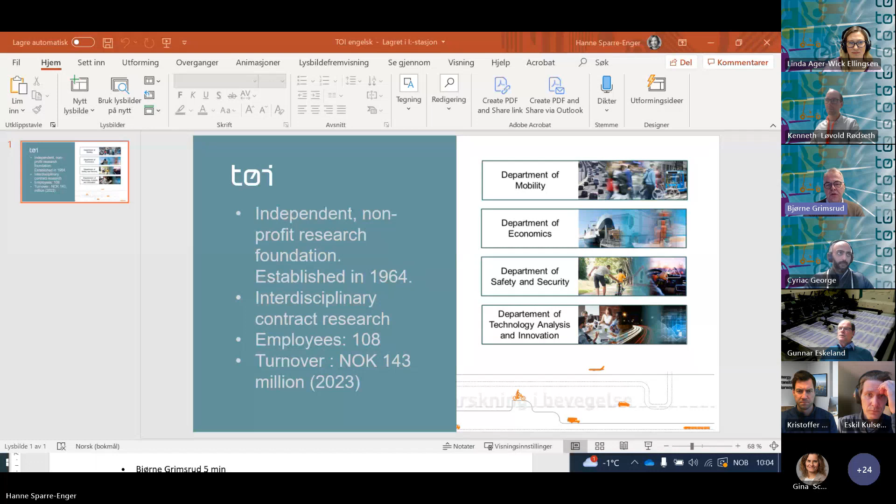Thank you very much, and thank you for having this opportunity to present TØI. I am heading this research organization, and I'm very pleased for TØI to be a part of this very interesting and needed research network and research activity on hydrogen.

I'm just going to briefly present who we are at TØI. We are an independent non-profit research foundation established in 1964, so we turn 60 years this year, and based mainly coming from social science, but very interdisciplinary contract research. That means we have employees with a very different background, but mainly social science, and that we are contract researchers.

That means that we are, in practical terms, based on the different customers that buy our research services. But of course, public funding like this is a main resource, of course.

We are 108 employees, 80 plus researchers, actually 90 plus, but 80 researchers full time, and we are organized in 4 different departments, which you see here.

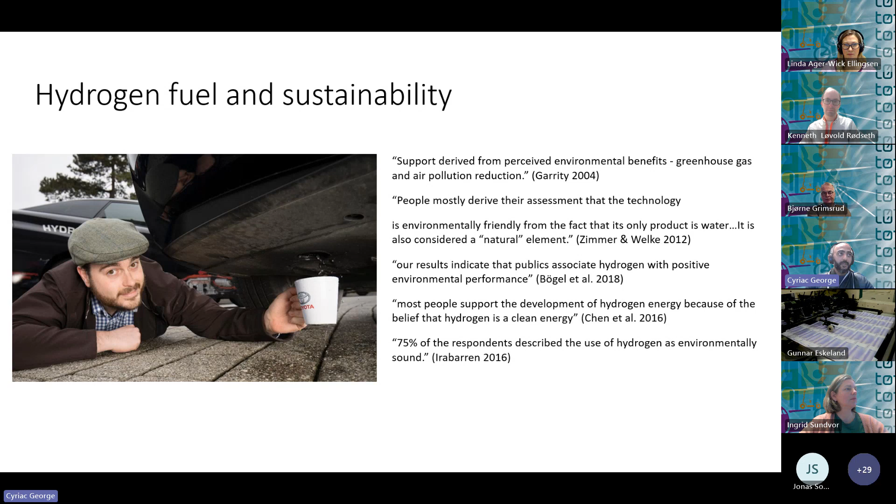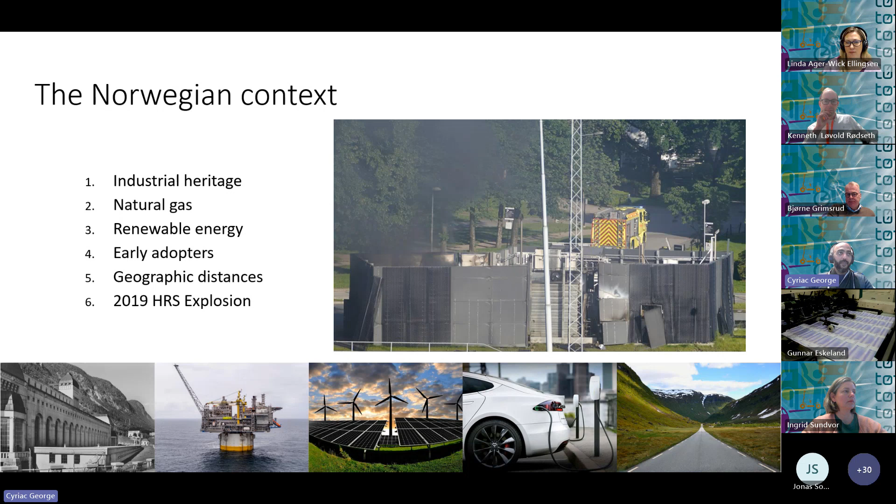What we did is we made a survey, nationally representative, with over 2,000 participants, about a year and a half after the explosion.

What we wanted to do here was ensure that we're not putting a lot of ideas in the participants' minds. So we did not want to make this a hydrogen survey and ask, are you scared of hydrogen? Because that is quite a leading question.

So the survey was actually structured as a comparative survey of alternative fuels and powertrains for transportation. Participants were given a range of questions about hydrogen, battery, petrol, diesel, and natural gas options. We were most interested in hydrogen, but all powertrains were included so as to present it in a more neutral manner.

In part two of the survey, participants were told that they would be given specific questions about one of the alternative drivetrains. In fact, what happened is every single participant was given hydrogen questions. Here we were able to ask some more detailed questions specifically about hydrogen.

There's a lot of factors we were interested in, but because of certain choices we made, we did not go into aspects of the green, blue, gray production methodology, gas, liquid, or ammonia. We didn't get into willingness to pay or even economic development, distriktspolitikk, that sort of thing. We were mostly concerned with awareness of hydrogen, perceived sustainability, and perceived safety risks.

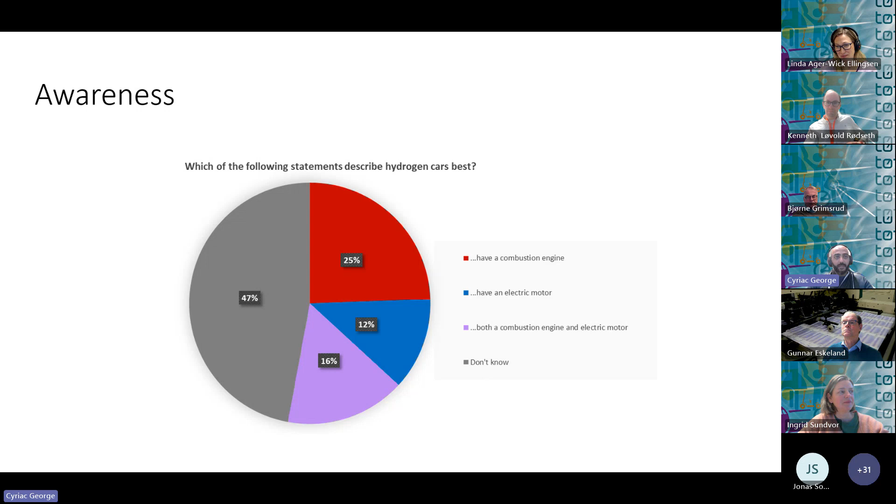This is a very small percentage of people that know that a hydrogen fuel cell vehicle is in fact an electric vehicle. And in terms of discourse, we felt that this was important in terms of how hydrogen vehicles are framed. And sure, we can't equate hydrogen vehicles with battery electric vehicles, but in terms of how it is perceived, I think there's a lot to be discussed there, especially given the fact that 47% of the respondents claimed simply they don't know.

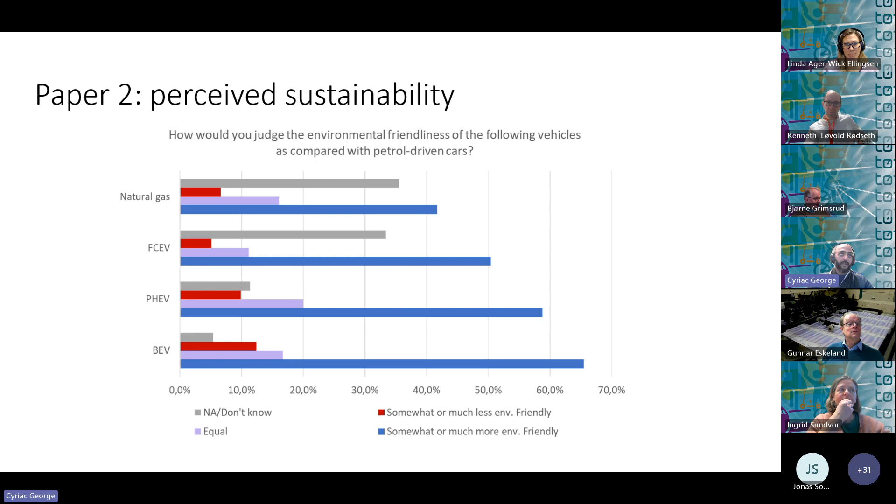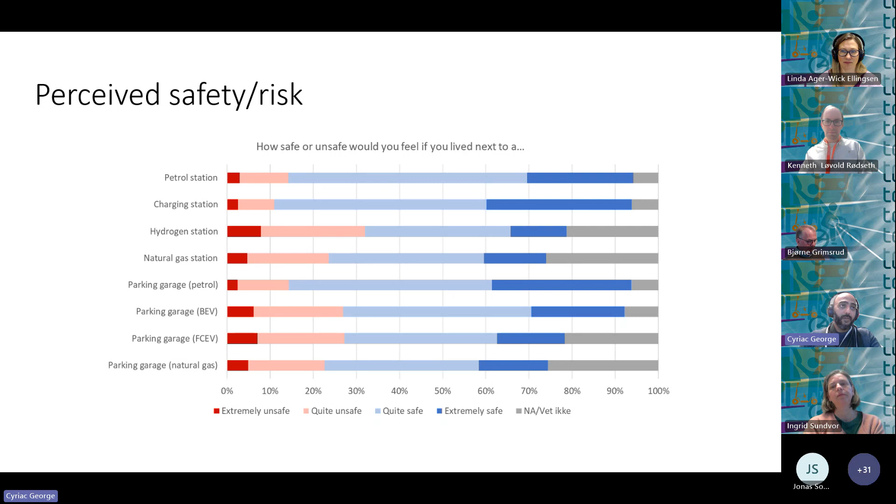Moving on here, we also asked about how safe people would feel living next to a station. We asked this because the societal acceptance of a fuel is not just about whether people use it in their own vehicles or in their own transport, but whether or not they are willing to tolerate it within their environment. And here we see, once again, that hydrogen has the least level of tolerance or the most amount of feeling unsafe. But it's also important to note that there is a high level of uncertainty, with about a quarter of respondents saying that they don't know, and more than half actually saying that they would feel safe. So this is not a very high level of fear, we believe.

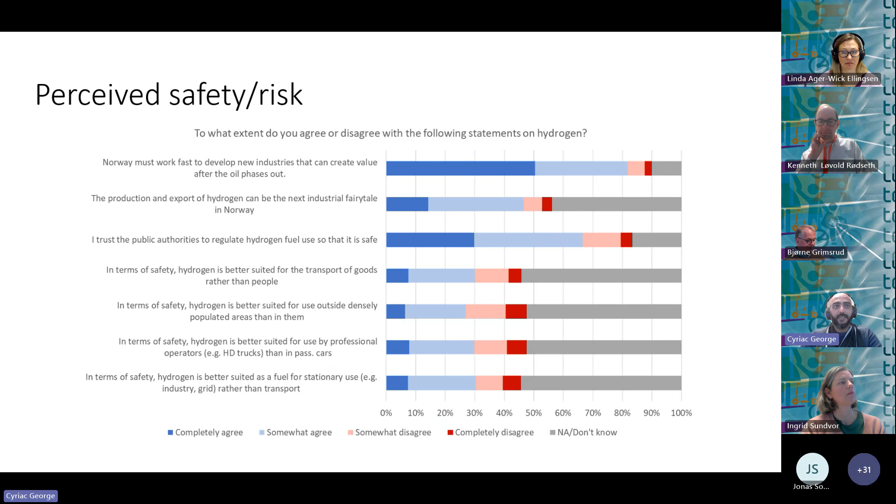Proximity to the explosion. This was somewhat surprising. There was a lack of significant relationship. There was even a slightly positive association with proximity, so the closer you were to the explosion, and this wasn't significant though, the less fear you had. And thirdly, perhaps the least surprising part of the analysis, the more aware you were about the explosion, the more scared you were about it. And this was a very, very significant relationship.

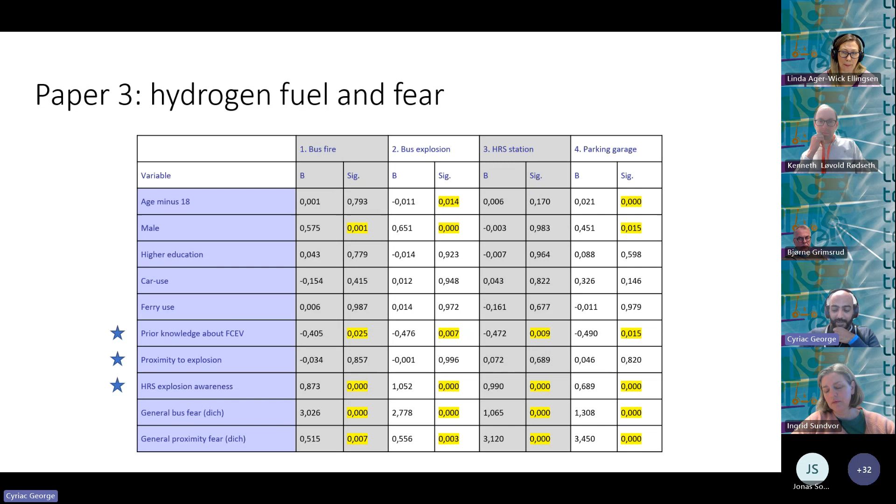We're still digging through this, and there's still literature that's going to be coming out from TOI with respect to this, but that's all for now.

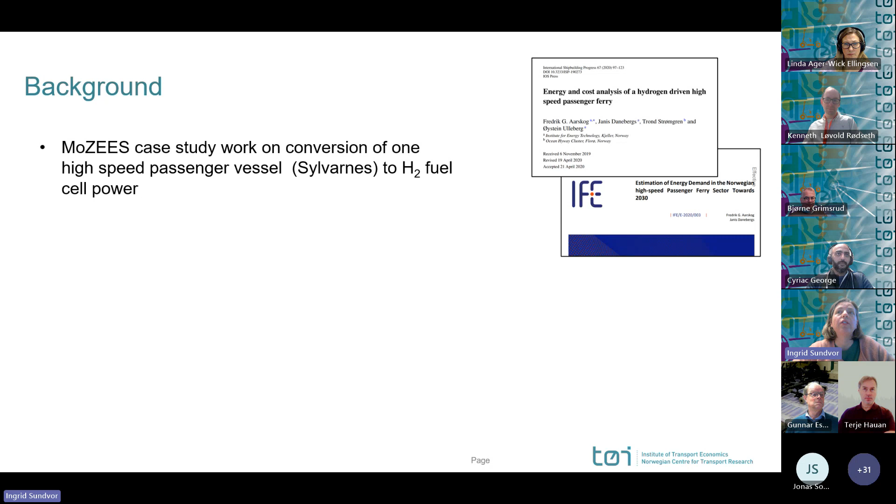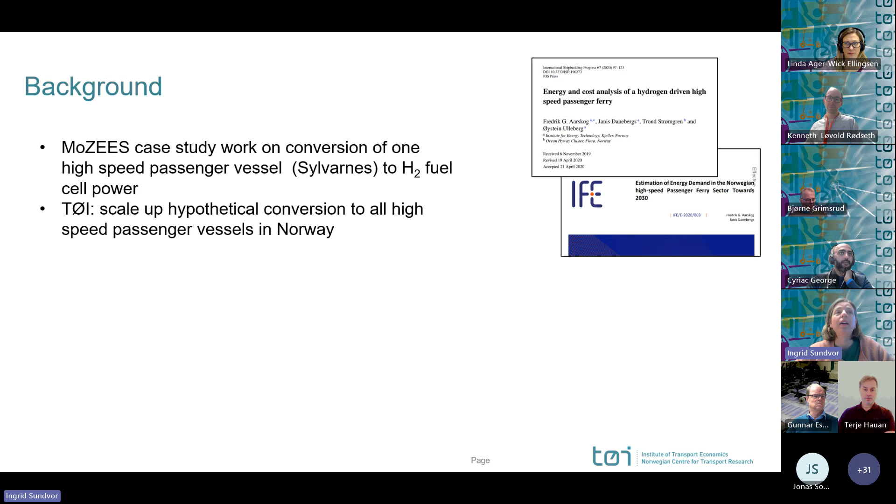So this work started in another FME, MoZEES, with the case study performed by IFE, where they looked in detail at one high-speed passenger vessel for conversion to hydrogen fuel cell power. And then the question was how about scaling this up for all high-speed passenger vessels in Norway, and that task was given to us. To be able to do that, we needed a model, and that's the birth of our model.

So we did scale up and applied this for all registered high-speed passenger vessels in Norway. This resulted in a paper, where you can read more about the results, but I will give some examples and cases from the results.

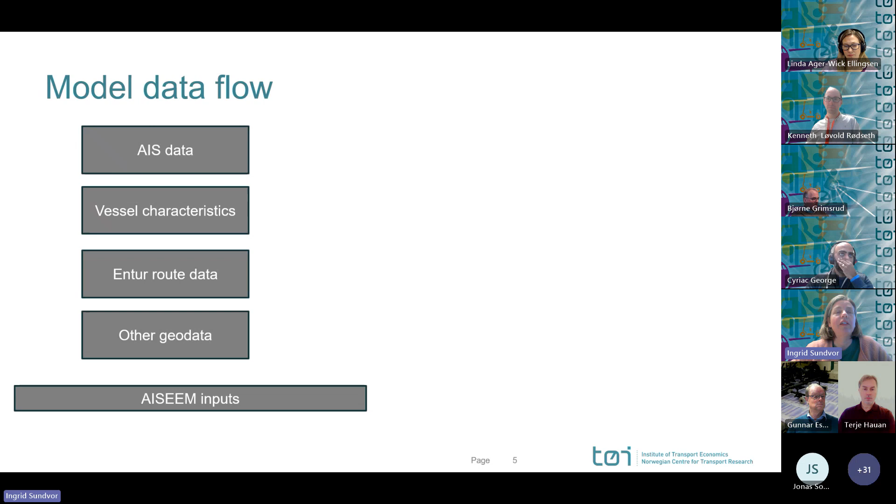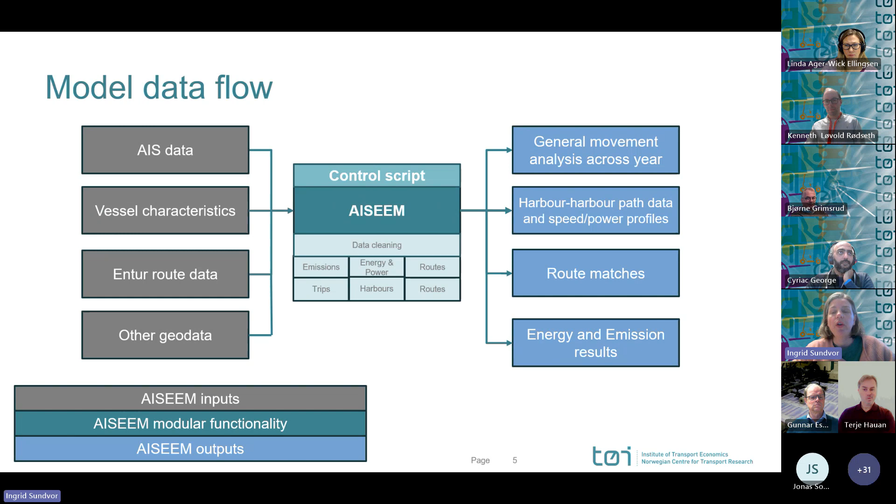I will go a bit more in detail on the different levels of the model, but first an overview. We have, of course, different kinds of data needed to do our analysis. The main model is quite modular, so we can pick and choose what parts we are interested in, according to the case. Some of the main outputs are general movement analysis, and more detailed harbor-to-harbor movements and speed power profiles, for instance. When we're talking about passenger vessels, the routes in public services are of interest. And this is an energy and emission model, so we also get results on emissions.

So a little bit about the data. This is an AIS model, so the main data is AIS, and the main data we use is the position and speed. This is high resolution data with varying timestamps, typically a resolution of 2 to 10 seconds. From this, we can do the movement analysis, but if we want to look into energy and emissions, we also need other ship data, for instance, very importantly, motor power and other characteristics of the vessel.

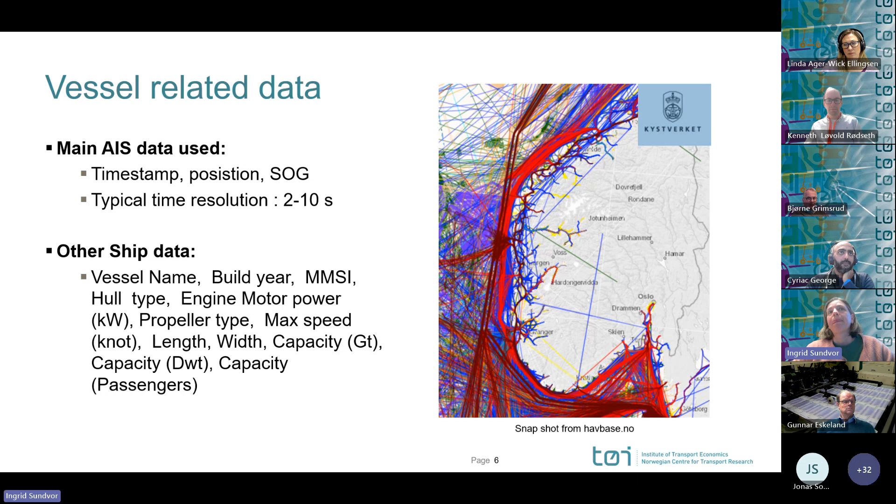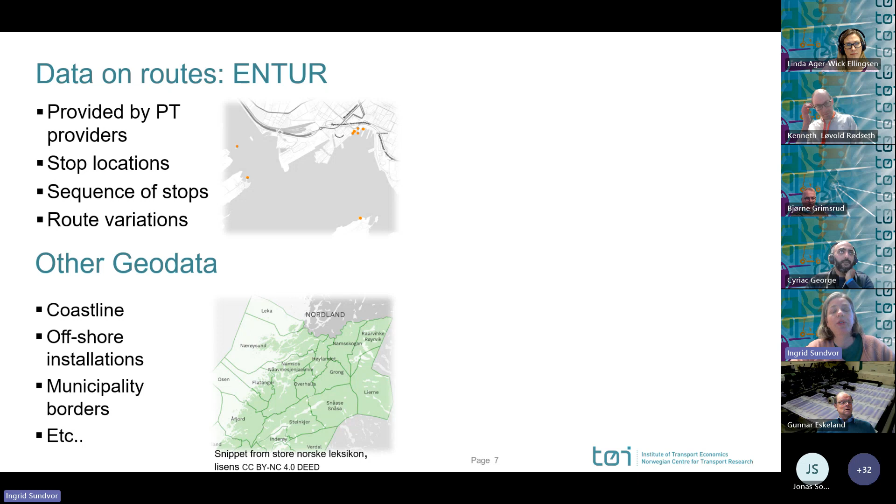Other data which might come of use: as I said, we have been looking at high-speed passenger vessels operating on public services, and having route information, where they stop, the sequence of stops, and how these routes vary is very useful. We also can make use of a lot of different geodata, like coastline, offshore installations, and municipality border data, which are important to match to get interesting results. We also have a possibility to connect with weather data. We have this in place, but so far we have not used this information in the energy estimate, but this is a possibility for future projects.

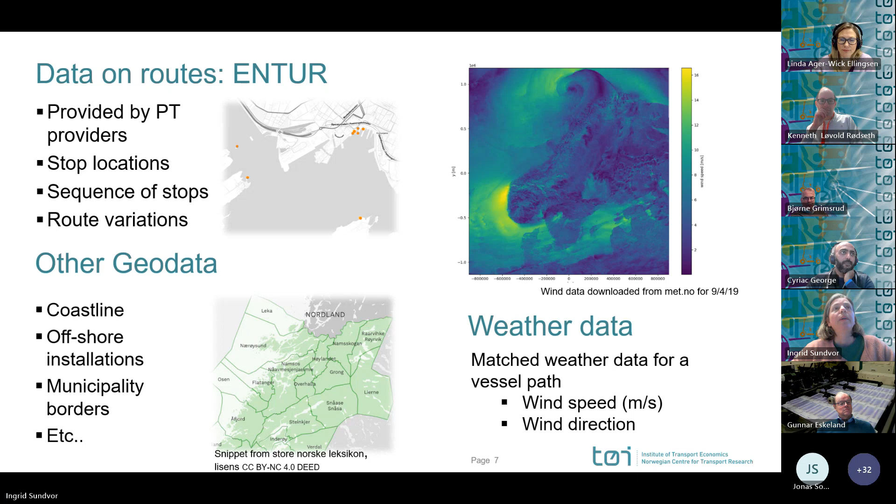So a little bit of how we do parts of the model. One, for instance, is how to actually identify where the harbors are, where they stop. We use low speed data points which we cluster, and then we can filter out unknown harbors, for instance, to have more information about the locations, or filter out false stops or stops at sea by using distance from coastline.

When we have the harbors, we can then split all the movements into harbor-to-harbor paths. And one of the interests, as is shown in the figure, is the speed profile between two harbors, which can give a lot of interesting information. We also get how much time they spend at each harbor, so arriving and leaving times at the harbor.

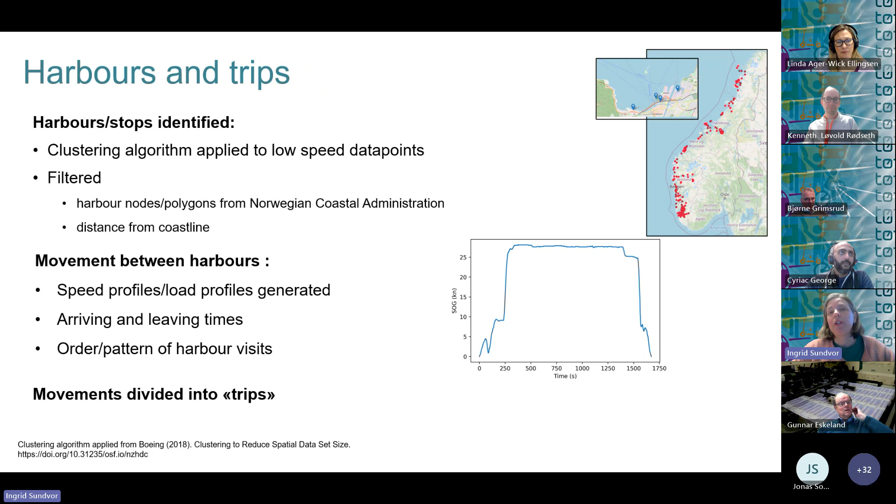And of course, the order of these harbor visits can be a route, so we can split all these movements into routes or trips, depending on either going from one harbor and coming back to the same harbor, or how much time they spend in a specific harbor. Here is an example of a route from Kristiansund to Trondheim and back. When we split this, we can also compare them with the timetable, as a quality control of our method.

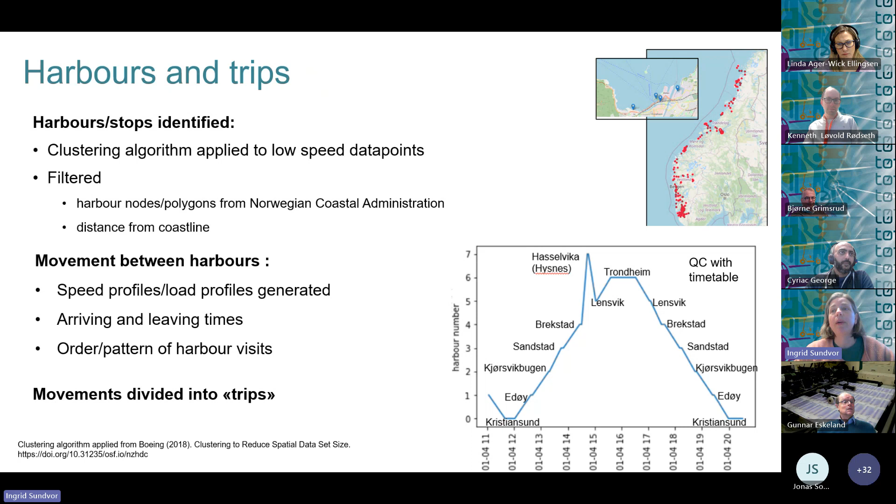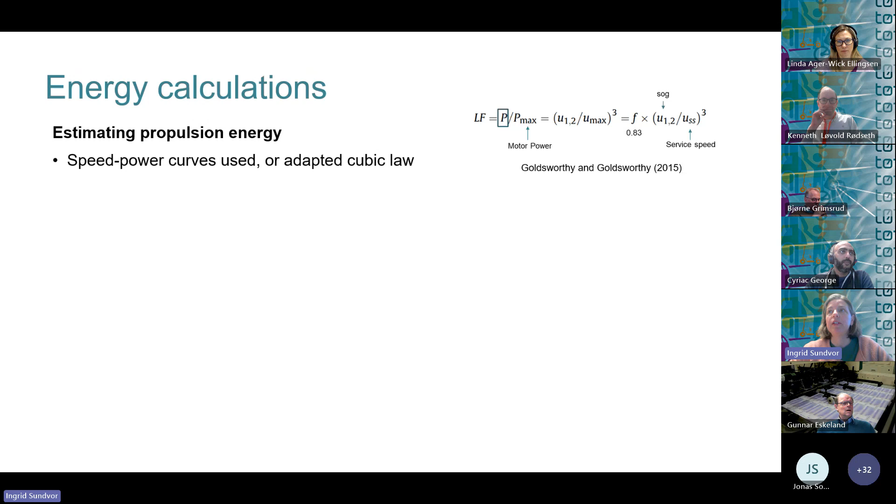When it comes to energy calculation, for the high-speed passenger vessels, we received speed power curves directly from Brødrene Aa, which is the builder. And for other vessels, we use an adapted cubic law. I will not go into detail, but the most important here is, of course, the speed data and the registered speed, together with the motor power.

So here is an example of results applying the model for Norwegian-flagged high-speed passenger vessels, where we've taken out the daily energy. An interesting perspective here is the large variation in the daily energy for these vessels. The interest in this study was also to see which vessels might be most likely to be converted or replaced by zero-emission vessels. So their daily energy need might say something about which might be most suitable for battery electric or hydrogen electric vessels.

Having the energy, we can also see the variation of the energy use in time and space. Here we have plotted the daily energy for all these vessels per weekday. As these are high-speed passenger vessels operating for public transport, we see that typically there are lower activities in the weekends, especially on Saturdays.

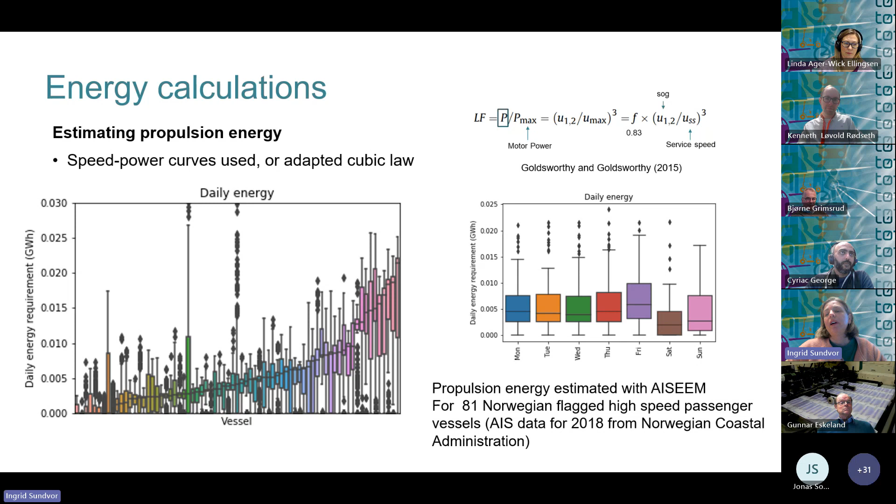If we now combine these two, both the energy and the locations of the harbors, we can allocate this energy need to the harbors. So here is an example where we've taken the daily energy and allocated all this energy to the longest stop for each vessel per day. This indicates that there are some major hubs, but there is also some energy need in small locations.

The interest of this is, of course, if you have zero-emission transport, where should they refuel? Where should you have charging infrastructure, if you keep today's activities and movements? So where you allocate this energy is not the same as which harbors are most visited. So this can vary. So that's a taste of what the model can do and how it has been used.

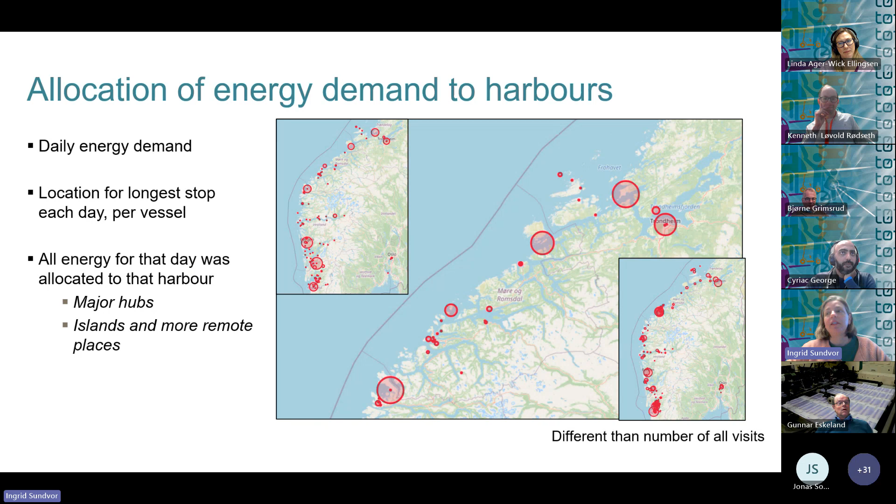We have several ongoing projects where we have applied the AISEEM model. As I said, MoZEES is where the initial development started with high-speed passenger vessels. We also have an ongoing project where we look at passenger vessels, but slower speed. There, the main focus is route and public transport. We also have an interesting project called FAME on fishing and aquaculture vessels, where we are interested in the zero-emission technology possibilities for these vessels.

And this model, of course, is continuously developing, and according to the project, we always have new interesting developments to look into. We have also done a similar study for bulk vessels, where allocating the energy need to the harbors was of interest, and IFE took this further to look into infrastructure needs. And then HyValue, where we are also planning to apply the model.

So this work is based on the same project that Ingrid talked about, the MoZEES project, where we look at high-speed vessel services. Ingrid's work belongs to work package 1, while this work belongs to work package 4, where we look more on the planning of the transport system with zero-emission high-speed vessel services. That means routing and scheduling decisions for vessels, more or less.

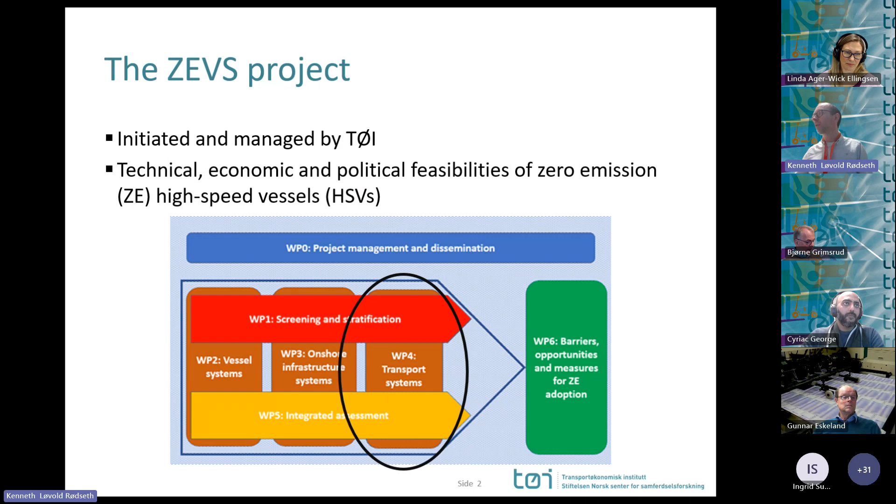So when we started out with work package 4, we focused more on battery-powered vessels and the planning of these for a given route. But then with the new requirements for zero emissions for high-speed vessels from 2025, we wanted to focus more on the planning at the regional level for a given transport system, rather than focusing only on a given route.

And then, as the previous study that Ingrid talked about shows, when we want to plan for multiple connections or services, hydrogen becomes an important solution, because you can apply these battery-powered vessels, but they have range limitations, and hydrogen needs to come in and fill the gap.

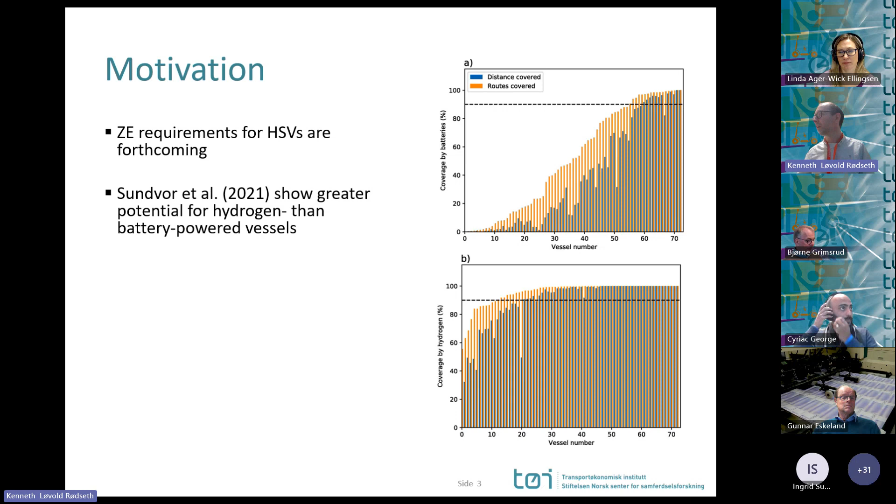So basically what we have done is extend our planning models for high-speed vessel services to accommodate both the selection between what kind of services should use battery-powered vessels and where we need to have hydrogen.

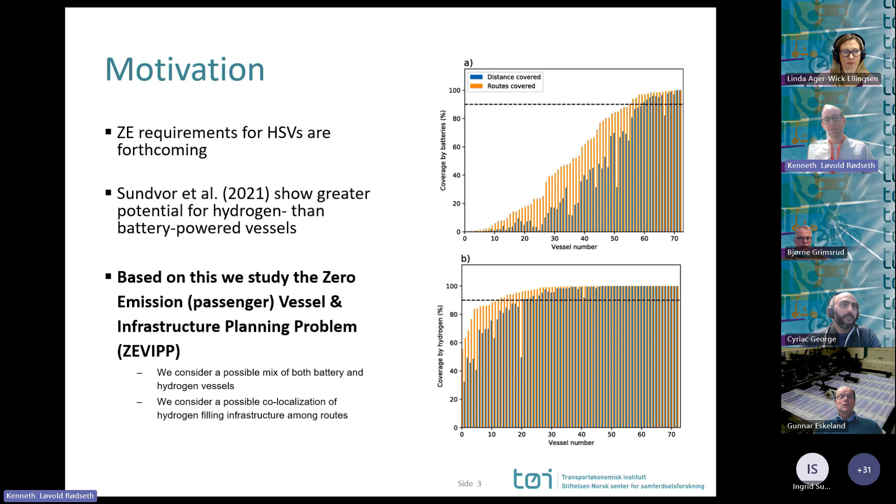And also what we're interested in as part of this problem is to understand the value chain for hydrogen. Where should it be produced? Should it be produced locally, or should it be a centralized production with distribution? And should there be economies of scale also in the refueling of vessels, in the sense that should multiple services share a refueling point?

So these are the decisions that we want to model as part of our overall problem. The objective is to minimize the system cost, both for the transport system in terms of choosing the fleet and the number and type of vessels that operate the transport system, but at the same time considering decisions for the energy system, such as where we produce hydrogen and how we distribute it. All these decisions are included in our problem.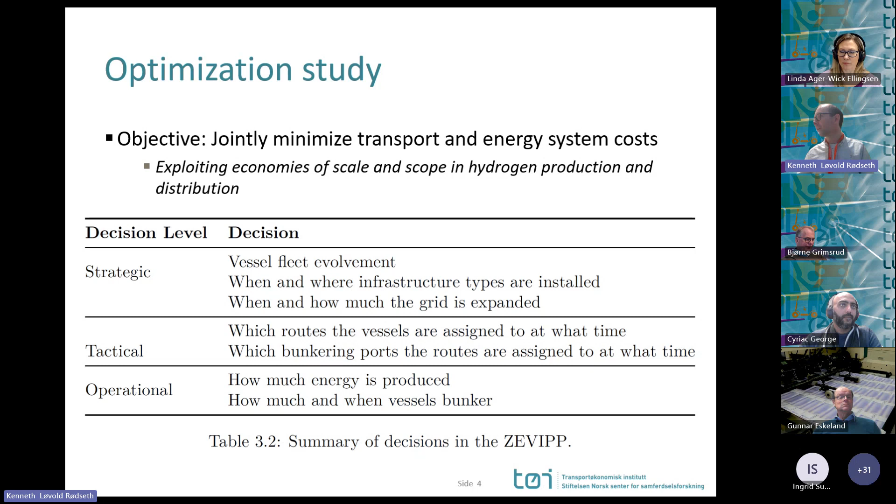I just wanted to highlight those decisions more linked with the energy production side. This is a dynamic model, so it also chooses when to install an infrastructure type and where to install it, among a set of candidate locations in Nordland in our particular problem. And of course, we also need to consider whether the grid must be expanded, which is also a cost of installing or going into these zero-emission solutions.

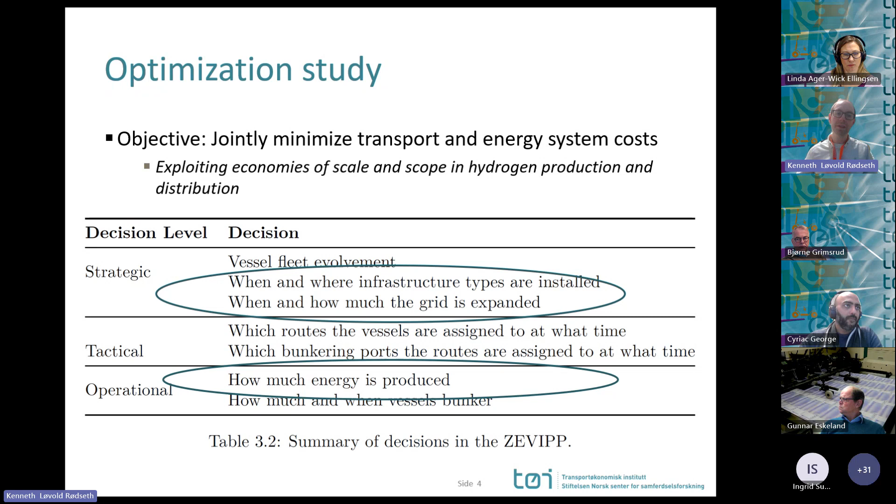And in terms of operational decisions, we also talk about how much energy is being produced in terms of hydrogen production.

In principle, we have here the possibilities for the different routes in Nordland to use different types of infrastructure and energy carriers. So we have a battery swap system, we have battery charging, and then we have two types of hydrogen infrastructure: either a centralized hub with distribution to refueling stations at a given port, or local production of hydrogen at the given site at the port. These are the options that we consider in our model.

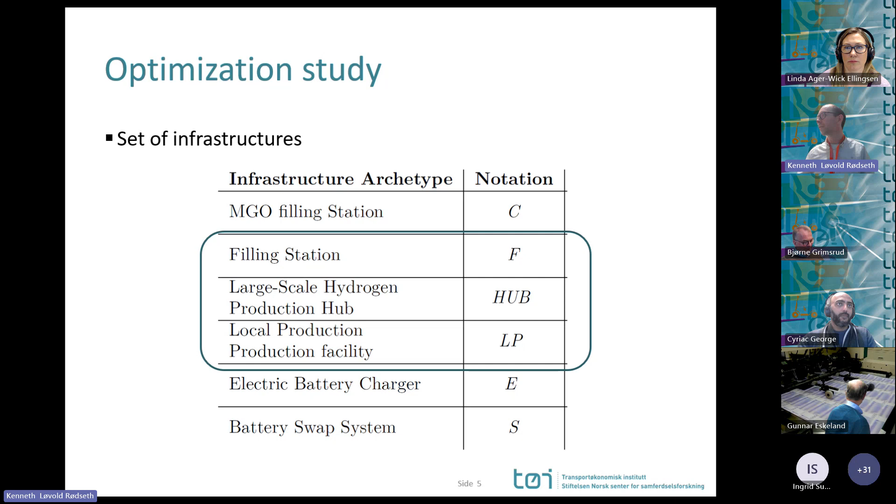I just want to give a brief explanation about the model, because this is a dynamic model, as I said. Basically, what we want to do is introduce a more and more strict carbon requirement, so the carbon emissions from the sector are required to decrease and eventually become zero over time in our modeling. And what the model does is make optimal investments in vessels and also in refueling and energy-producing infrastructure.

So this is just a very simple example where we have 4 different routes. The triangles indicate where you can bunker or charge the vessels, the squares indicate the vessels, and the color codes indicate the type of energy carrier. In time step 1, we start off with everything in red, which indicates conventional diesel vessels, and now the model is making investments.

In this system, we make an investment in a given period, and then it becomes the investment. Say you invest in a battery powered vessel, then that becomes available in the next period. So there's a lag between the investment and the use of a vessel.

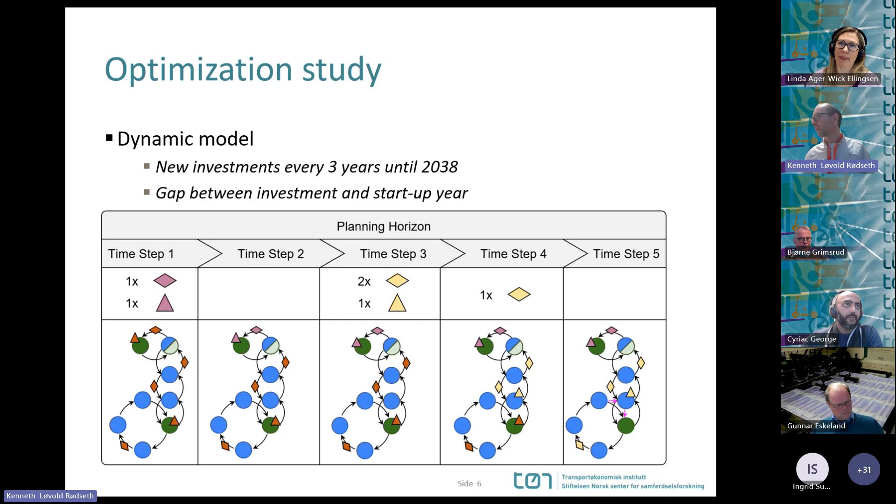So what we do is implement this for the high-speed ferry connections in Nordland. There are 19 of them in total, and we do this scenario analysis where over the course of some years we approach a zero emission transport system.

So this figure shows the number of vessels and what kind of vessel types the model selects for this transition to zero emission, starting from 2023, the current system. Everything in brown indicates diesel vessels. I use the code C here, meaning conventional vessel, that is diesel, and everything in 2023 is diesel in the current system. But then everything changes as we approach the year 2038.

In 2038, we require the model to select a zero emission system for all services in Nordland. The transition is somewhat slow in the beginning, but then something happens in 2029: you start investing in battery charging and battery swap infrastructure. Our interpretation is that these battery systems are much more energy efficient than the hydrogen system, so you opt for those first.

But once you reach the range limit of battery powered vessels, you are sort of forced to make investments in hydrogen if you want to go full-fledged zero emission. So that's what happens here. The yellow colored vessels use the code H for hydrogen, and the numbers indicate the size of the vessel in terms of passenger carrying capacity. You can see that the majority of vessels in 2038 are hydrogen.

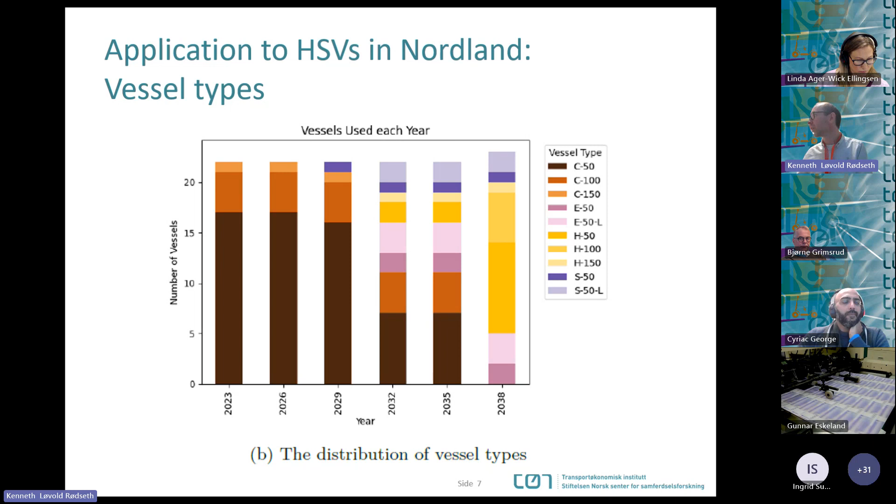Hydrogen is needed because in Nordland they have very long and complex connections. If you want to go zero emission, given the options in our model, which are battery charging or a hydrogen vessel, you are forced to go to the hydrogen vessel if you want a complete transition.

Then we look at where we should install different infrastructures for either refueling or charging. This is not so easy to interpret without context, but I'll point out two main takeaways. First, we look at the trade-off between local production and centralized production of hydrogen.

What this model has selected is to have centralized production in Bodø, with transport or distribution of hydrogen to other locations. The yellow dots are refueling stations that receive transport of hydrogen from Bodø. So the main takeaway here is that centralized production of hydrogen is cost effective compared to local production. Maybe not surprising, but of course you need a somewhat dense market to make this work.

Another takeaway: if you look at the different dots, you can see numbers in brackets, which identify the different connections that use the refueling points. For several of these dots, there are many numbers in one bracket, meaning the model also opts for co-utilization of refueling points. So it's not only economies of scale in production, but also co-utilization of hydrogen refueling points, in order to have a more efficient value chain. Those are the two takeaways from this picture.

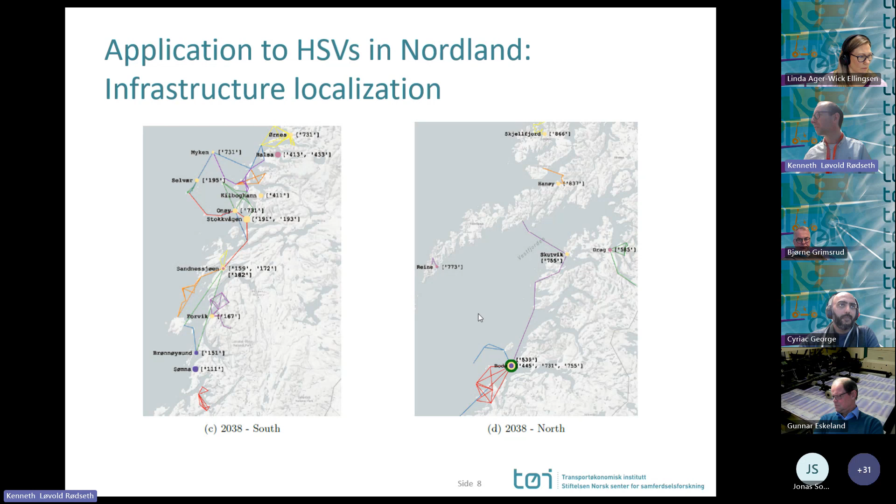Another interesting discussion from the policy side is what this will cost. We looked at the abatement cost, measured by optimizing the system for conventional vessels without emission reduction requirements, then running the model with a scenario requiring emission reduction, and comparing the costs. In this chart, each line represents the abatement costs for a given connection in Nordland, indicated by these numbers. You can see that in some cases with very short connections where you can use battery-powered vessels, the abatement cost could even become negative. But in general, the abatement costs are much higher on average than the 2,000 krone per ton, which is the social cost of carbon for 2030 announced by the Norwegian government. So in general, this zero emission transition is very costly.

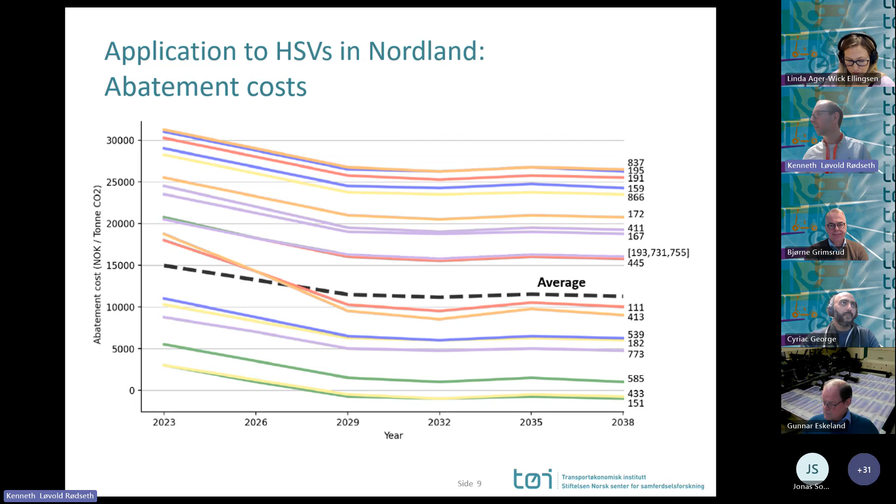We have also done several robustness checks on these results. These are our main results, but in general this holds also for different sensitivity tests. To conclude, when we model this scenario analysis for high-speed services in Nordland, we find that battery-powered vessels are generally preferred, and are also more known and mature than hydrogen technology. But if you want a full-fledged transition to zero emission everywhere, as the new requirement suggests, you need to think about hydrogen as a solution. If you want to introduce hydrogen, it must be cost effective, so you need to think about the value chain and where you can exploit economies of scale, not only in production but also in consumption of hydrogen, and how end users can change their behavior to have a more efficient value chain. Finally, our findings suggest that abatement costs, especially for high-speed ferries, are very high. Thank you.

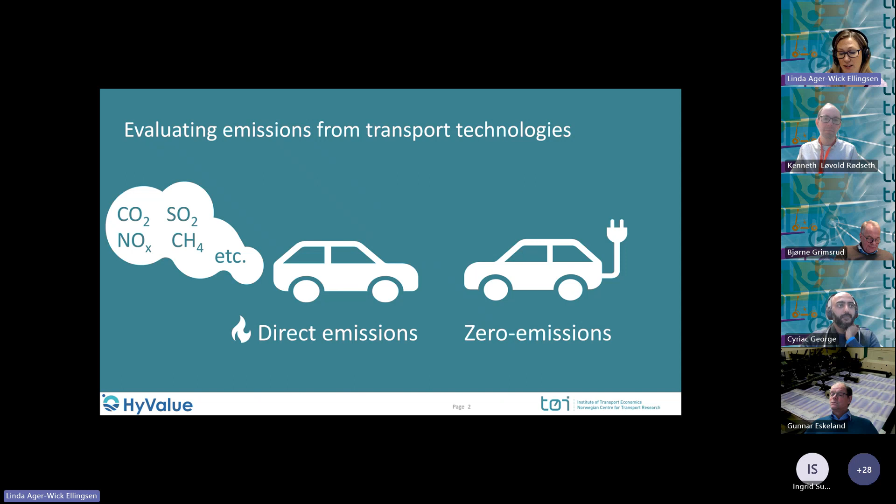Thank you, Jonas. I will start this presentation by having a general look at emissions from transport technologies, here exemplified by the passenger car. When we consider emissions from conventional transport technologies, we often tend to focus on the emissions stemming from combustion of fuels; these are what we refer to as direct emissions. When we take this perspective and look at electric transport technologies, we find there are no emissions, so these are often referred to as zero emission technologies. That doesn't mean there are no emissions associated with electric transport technologies—it's just that these occur upstream or downstream of the use phase, and these are what we refer to as indirect emissions. All transport technologies have these emissions; it's just that they are not very obvious, and it requires a system perspective to capture them.

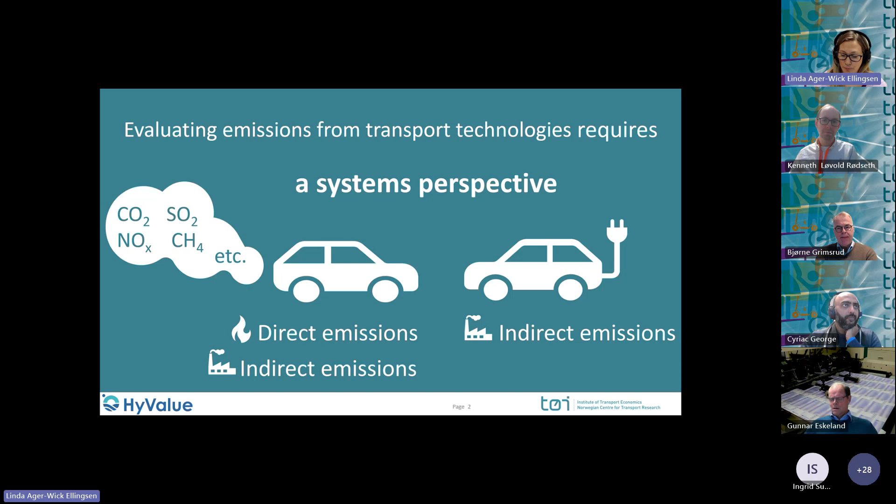To do that, we use a life cycle assessment. LCA is widely recognized as the best framework for assessing the potential environmental impacts of different products and services. At TØI, we are using LCA in a few different projects, of course including HyValue, in work package 6, where we are considering hydrogen.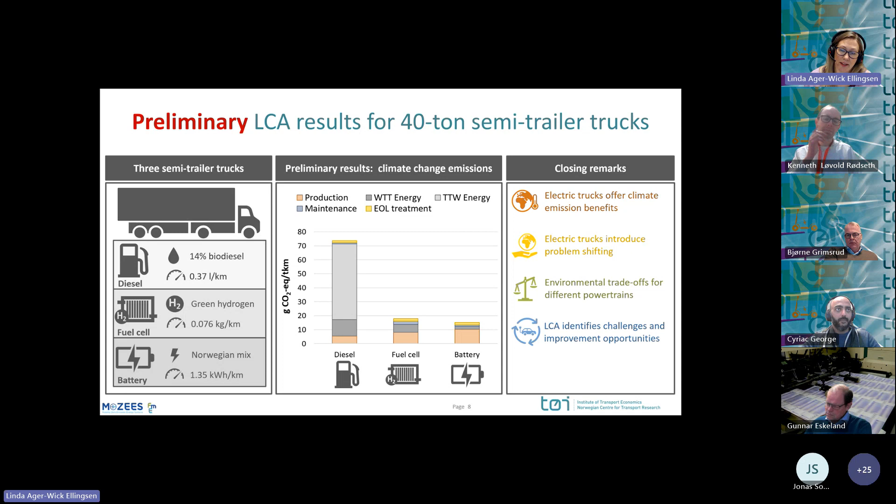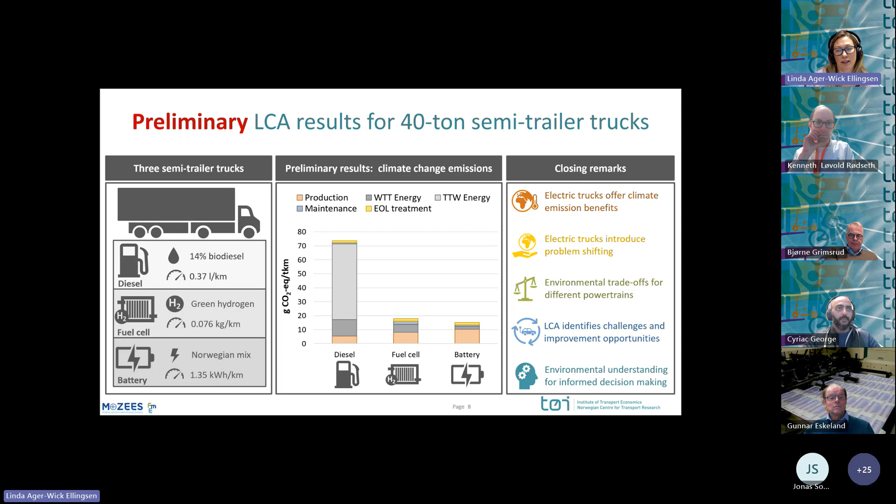The life cycle perspective allows us to identify challenges, but also improvement opportunities in very complex and global supply chains. So it's a very powerful tool, and the environmental understanding that we get from these kinds of analysis is very important for making informed decisions.

And that was everything I had to say. Thank you.

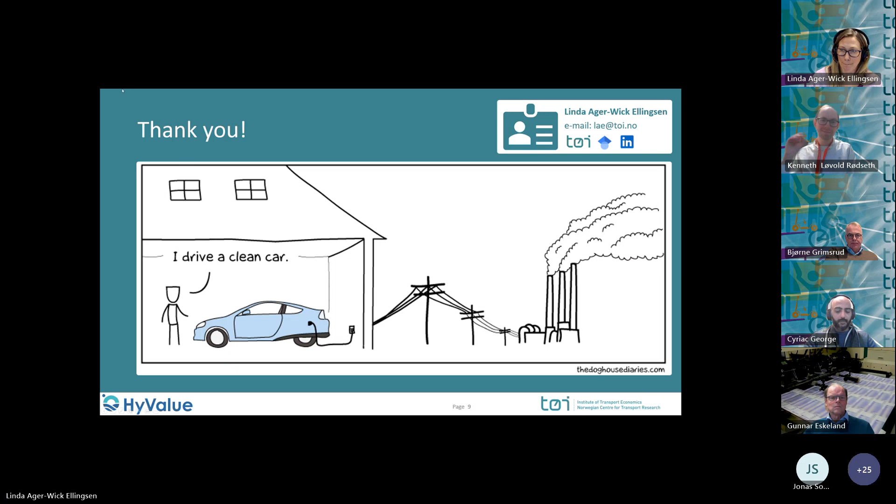We have 2 questions in the chat, and I would like to just take them quickly. First question is to Linda. Could you please explain a bit the units, gram CO2 equivalents per ton kilometer, something like that? And the second is: is it considered the different weights of the trucks and capacities to carry a load?

Okay. Yeah, so when we talk about climate emissions, these are often measured in gram CO2 equivalents. I assume that most are familiar with this phrase. So when we are reporting them in gram CO2 equivalents per ton kilometers, we have normalized it to the freight and distance that is being carried. So in the study, we assume that the trucks on average, and this kind of answers the second question, all of them on average carry a load of 16 ton.

We have not considered any differences in the capability of doing that for the different trucks, even though the battery trucks are particularly a little bit heavier. So we have just considered the average weight, and that is considered in addition to the total mileage, which was considered to be 800,000 kilometers based on an annual mileage of 100,000 kilometers and an operation time of 8 years. So you could say that the complete emissions for these vehicles have been distributed per kilometer with freight that is being carried. I hope that is clear.